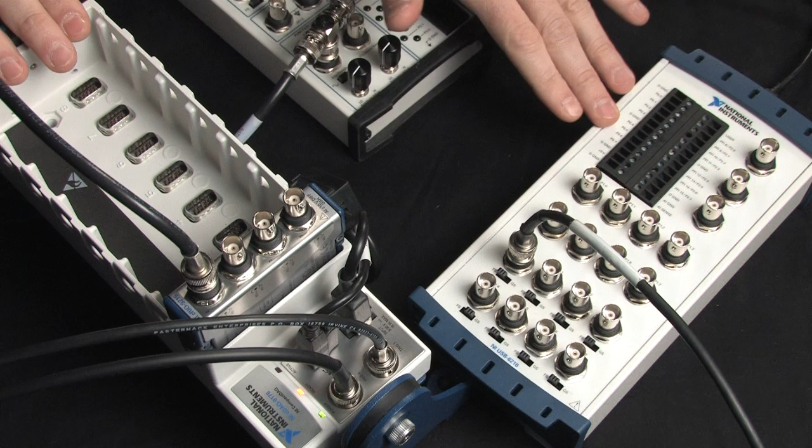Now, in some situations, you may have boards inside of your desktop PC. These devices can be linked physically using a cable internal to the PC, known as a RTSI bus. But for today's situation, I have two different devices on the desk here. One is a USB MIO device. The other is a USB CompactDAQ chassis. And I'm going to synchronize these two devices using standard BNC cables.

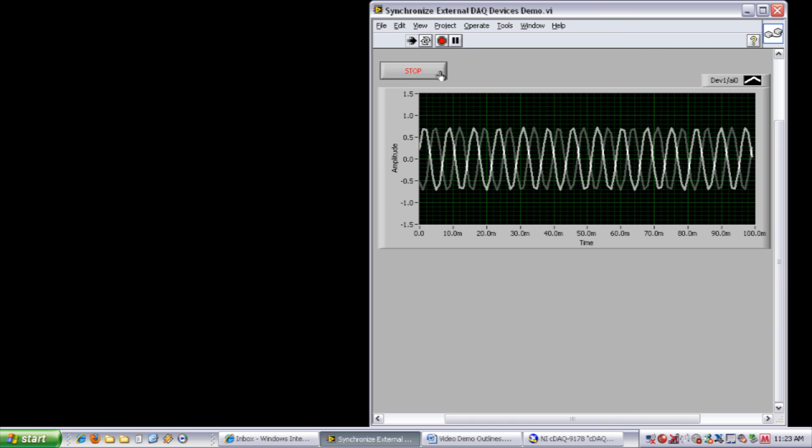Now let's look at the software and see the test system that I already have set up. Here I have a VI running an acquisition from one of the devices. This is the USB M Series device. And you can see I'm hooked up to a function generator, so I can modulate my amplitude. And let's go ahead and look at the code. You can see I have a simple DAQmx task set up using the API.

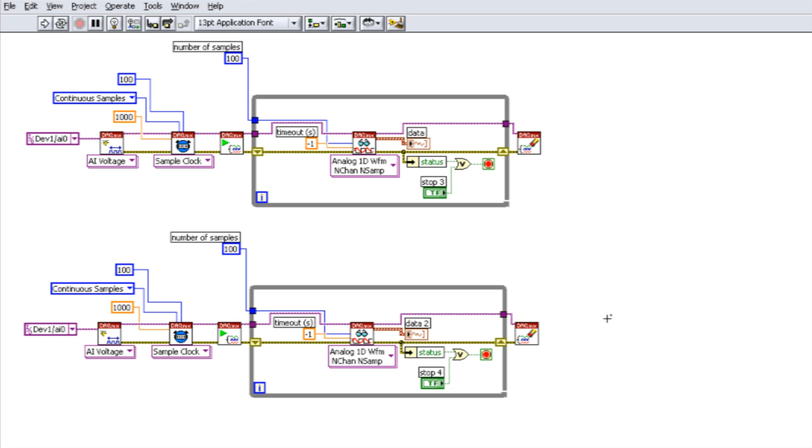But now let's say I want to expand my system and add the CompactDAQ chassis to it. To do this, I'm going to simply highlight everything, hold down the control key, and effectively copy one task into the other. Now, because both of these devices use the same driver, changing the address from one device to the other is as simple as selecting from a pull-down.

So I'm going to take my DAQmx channel device pull-down and change it from device 1, which is the USB M Series device, to cDAQ1, module 1, AI0. Now if I hop back over to my front panel, I can go ahead and move my stop button out of the way and clean this up a little bit.

And if I run this, you'll see that both devices will run, but they're out of phase. And that's because the devices started at a different time, and they're running on their own internal clocks, which are not going to be in sync. So now we're going to go back into software, and we're going to set up the DAQmx tasks to where they can share these start and sample clocks externally.

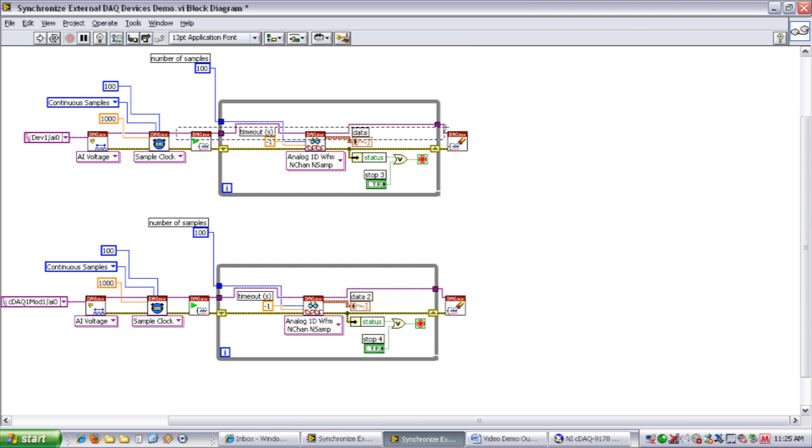I'm going to start by giving myself a little room on the block diagram. So if I hold down the control key, left click, and just drag myself a nice large window, that'll give me some space on the block diagram to work. I'm also going to delete some of these wires in between, giving myself a nice empty spot in the middle where I can add some new functions. I'm going to open up my DAQmx data acquisition API palette. I'm going to go down into the task palette and grab an export signal VI.

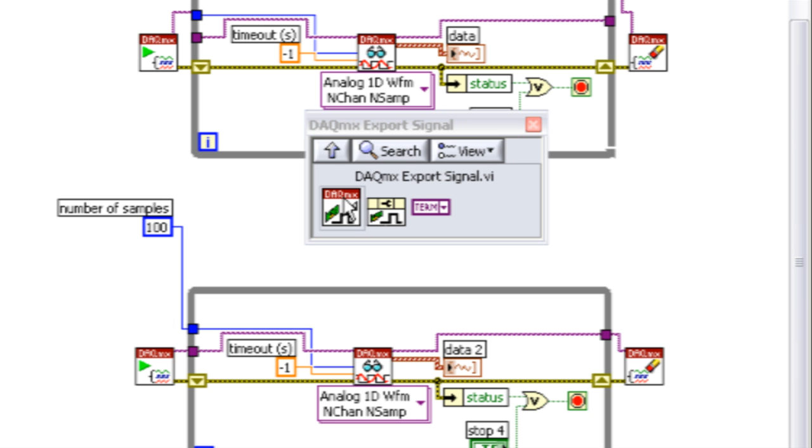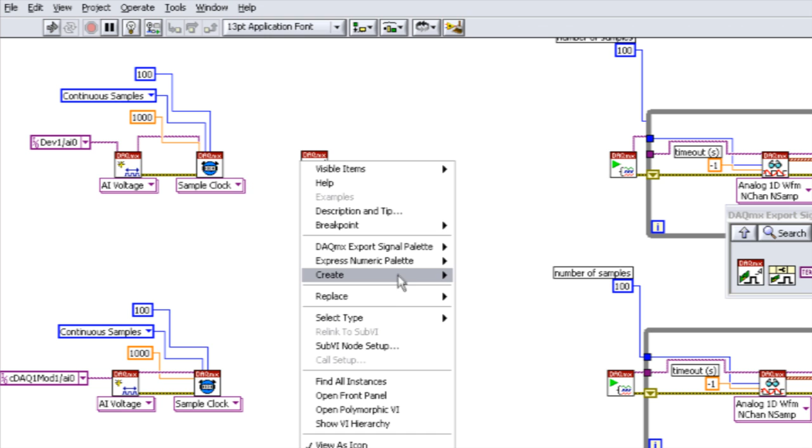Now the export signal VI is going to take the start and the sample clock from inside the USB M Series, and it's going to route it to one of the BNC connectors on the front. And in this case, I'm going to use PFI line 0 and PFI line 1. These are specialty digital lines that were built specifically for triggering and other types of external communication. So I'm going to start here, and I need to create a constant on the signal input. And you can see that the default is sample clock, and that's good.

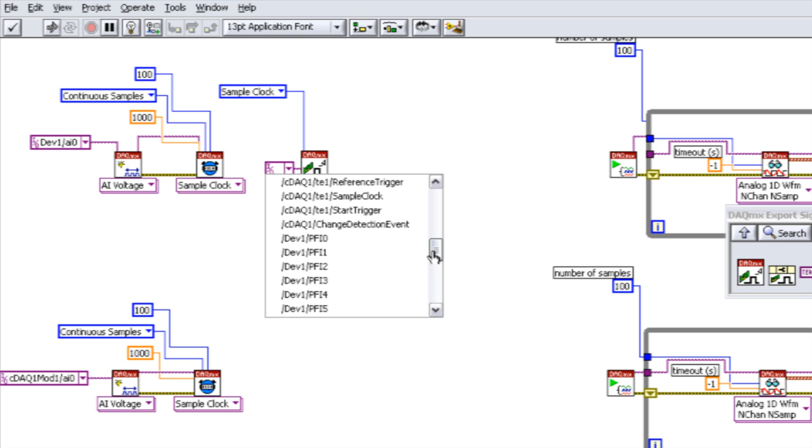Now I need to route this to a physical terminal. And for the sample clock, I'm going to do PFI line 1. Now remember, we're coming out of the USB M Series, so I have to go down to device 1 and select PFI 1 on device 1. So there you have it.

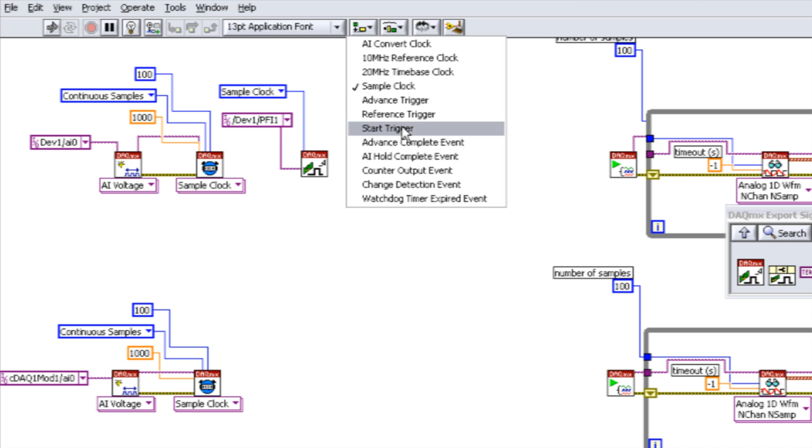Now since I have two clocks that I need to export, I'm going to highlight this and do the hold down control copy again, slide it over. And now all I have to do is change my options. I've got the sample clock, so now I want the start trigger. And then, since I've already got PFI line 1 engaged, I'm now going to slide this over to PFI line 0, and I can go ahead and connect this on through.

So now the software is going to tell the device to route its internal clock signals to an external pin. So now how do we get that to the other device? Well, we go back to that BNC cable that I talked about earlier. We use one cable for PFI line 0, and you can see this is connected to line 0 on the cDAQ chassis, so I connect it to line 0, PFI line 0 on the USB.

And then the other one I have connected to line 1 on the cDAQ chassis. And we will go ahead and hook that up real quick to line 1 on the USB MIO device. So I have one for my clock and one for my start trigger. So now that they're physically connected, we have to go back in software and tell the CompactDAQ chassis not to use its own internal clock, but instead to use a clock that's coming from an outside device.

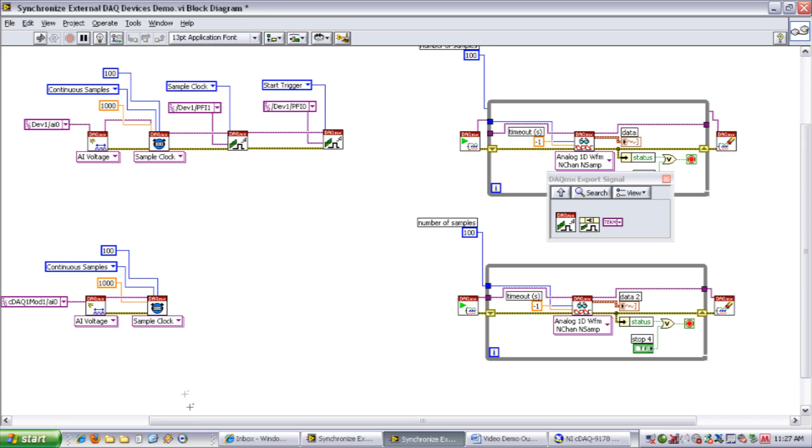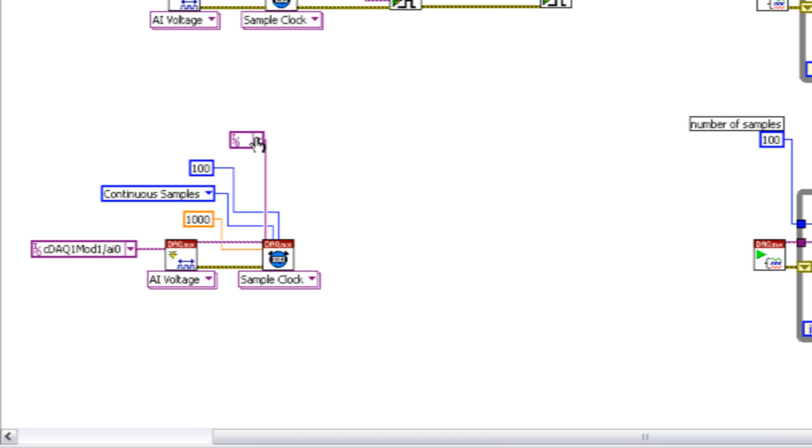Now, for the cDAQ task, you can see that the sample clock is already an input terminal on the sample clock VI. So I can just right-click, go to Create Constant. I'll go ahead and move this up so I can see it. Let's see, what is this? This is going to be the sample clock, and the sample clock again was routed to PFI line 1. So this time I'm on the receiving end, so I choose cDAQ1 PFI 1 because it's the input.

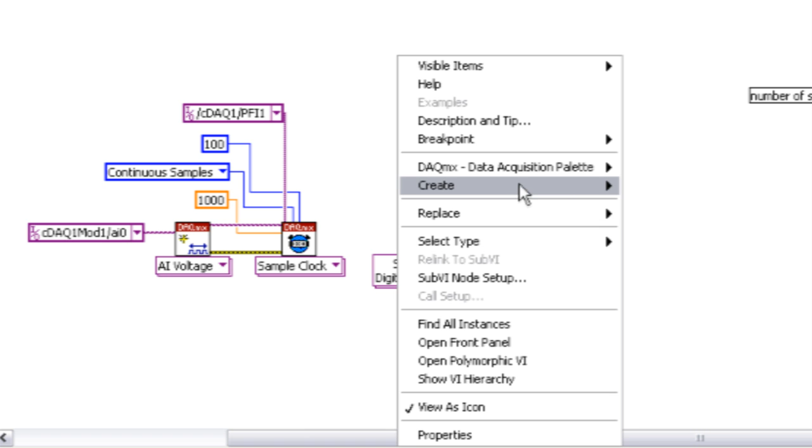Now I can go back to my DAQmx palette because I need to input a start trigger. So I go ahead and grab the trigger VI for the DAQmx API, select Digital Edge, and I now have, again, a source terminal to which I'm going to create a constant, and my start trigger is going to be on PFI line 0 of cDAQ, because again, we're coming into the cDAQ chassis. So I'm going to go ahead and connect this on through.

So now I've told my MIO device to output its start and sample clock, and I've told my compact DAQ chassis to input a start and sample clock. The last thing I have to do is make sure that the compact DAQ chassis is enabled first, so it's ready to receive the clocks as they come in. To do that, I'm going to use a structure in LabVIEW called the flat sequence structure. And you can kind of think of this like a comic strip, where it's going to read one frame at a time.

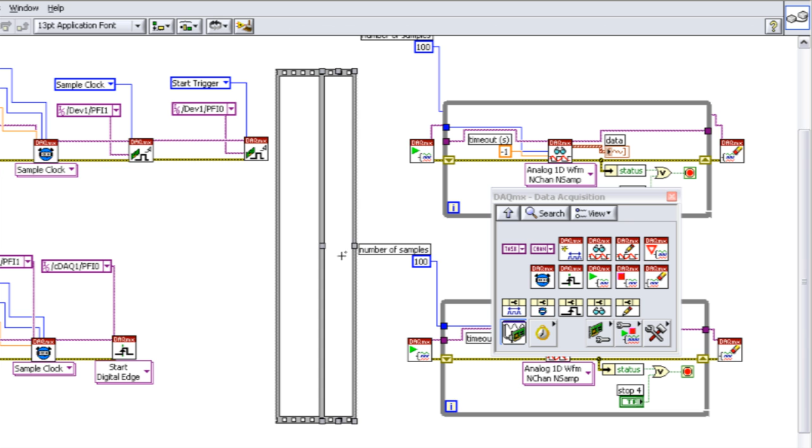So I'm going to create 2 frames here, and all I'm going to do is drag the start button for the compact DAQ task into the first frame. Go ahead and get rid of that. And I'm going to grab the start task for the USB for the origin of the clocks, and I'm going to make that one go second. That way, cDAQ is ready to receive, guaranteed, when the USB device fires. And now it's just a matter of wiring these through.

Now in this situation, I'm just using one channel on each device. I could just as easily be using every channel on each device. The compact DAQ chassis can actually acquire up to 256 channels with 8 modules installed. So you can imagine, of course, one of the reasons for needing a second device is to have more channels. So if I just need to expand my device, you can see in this short time here, we've been able to do that because of the DAQmx API and because of just the inherent ability of LabVIEW to copy code.

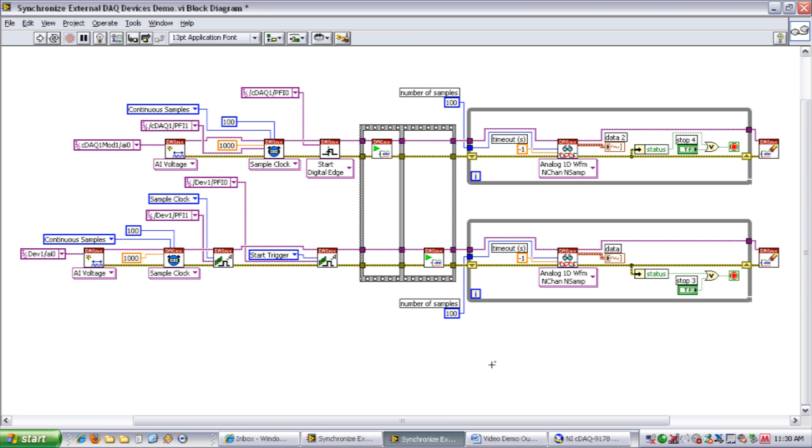All right, one last thing I'm going to do is I'm going to use the cleanup block diagram tool, and that'll just clean up my block diagram and make it easier to read and look at. All right, so now I'm going to go ahead and switch back over to the front, and now when I run this, you can see that both of my waveforms are acquiring, except this time the peaks are lined up, the 0 crosses are lined up because they started at the same time, and they're acquiring at the same time.

So you can see that as I modulate my frequency or my amplitude, if I slow it down a little bit here, you can see that they're in perfect alignment because they're using the same clock. And that's how you synchronize 2 external devices using DAQmx and LabVIEW.